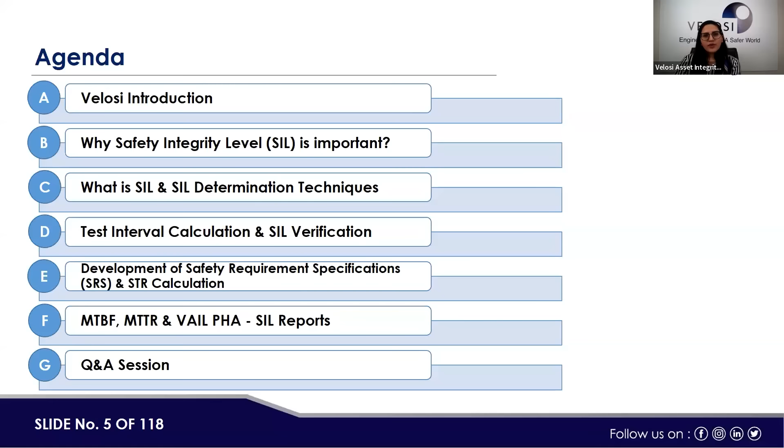Since this is a very detailed and thorough topic that we have chosen for today, we will just be touching the practical aspects. During this webinar you will go through Velosi introduction, why safety integrity level SIL is important, what is SIL and SIL determination techniques, test interval calculation and SIL verification, development of safety requirement specification (SRS) and STR calculation, MTBF, MTTR, and VAIL-PHA SIL report. At the end we will have a detailed question and answer session.

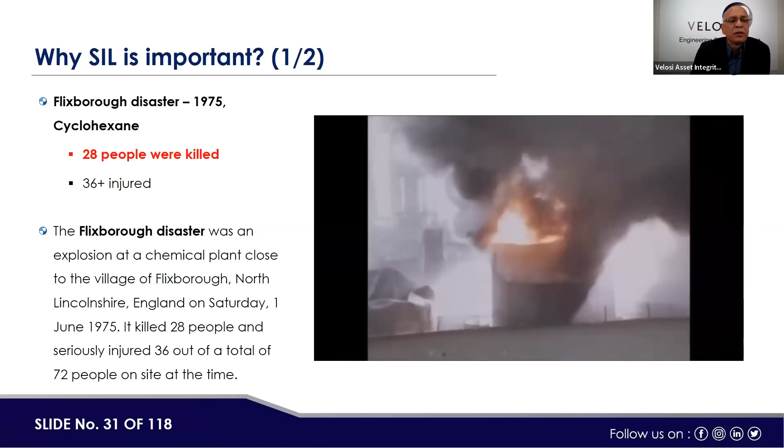It is the Flixborough disaster of 1975, where 28 people were killed and 36 got injured. As a result of this incident, there were learnings on how these kinds of incidents and fires could be prevented, and that's why these standards were basically initiated: IEC 61511 and IEC 61508.

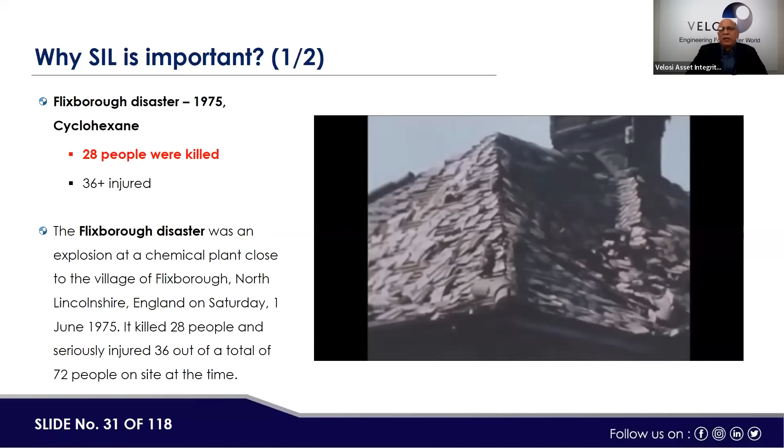So let us see, once the video completes, then I will go to the next slide.

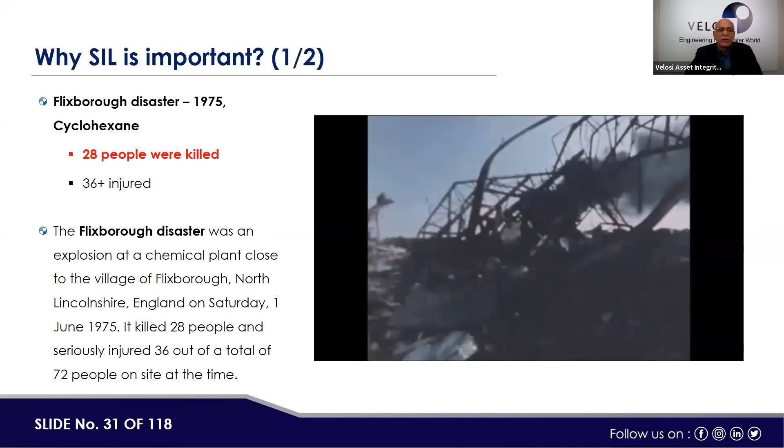This incident was in England, Saturday, 1st June 1975, and due to release of hydrocarbon and fire, there were basically 28 people killed, 36 injured. This is the end result; you can see the whole plant was destroyed and fire was still continuing.

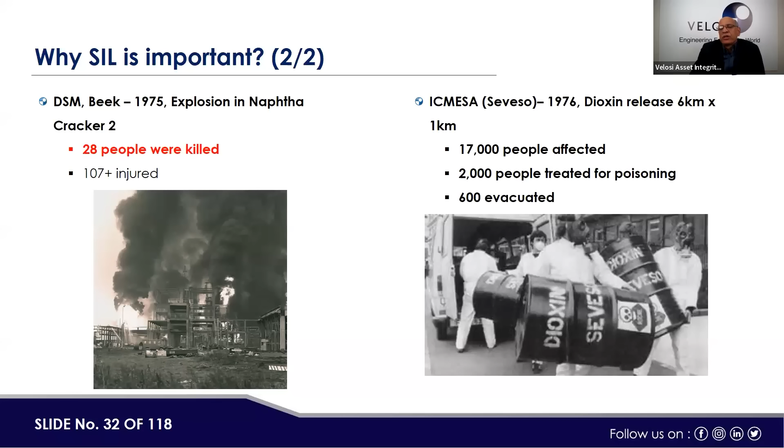There are other incidents as well, like DSM Beek in 1975, again 28 people were killed, 107 injured. Then ICMESA, Seveso 1976, an incident where 17,000 people got affected. And also don't forget the India Bhopal incident, where the carbide plant had a leakage of a toxic element that caused disaster in the area. Based on these major incidents, the industry started thinking about how such disasters can be avoided, averted, or prevented.

The reason is the Swiss cheese model, like if every layer is left to be taken care of by the next layer, and every barrier is not being attended to, then accidents can still happen. That's called the cheese model, where no barrier or system is playing its role.

Under these 9 layers of protection, one is the basic process system, like inherent safe design. Then the next stage is the basic process control systems, BPCS as we normally call it, instrumentation and control systems. That is the second layer of protection, where the control room plays its role.

Then there are alarms. In the control room, there is also control valve fluctuation, basically the control valves maintaining pressure and temperature with the help of throttling of the valves based on the signal received from the pressure transmitters, level transmitters, and flow transmitters.

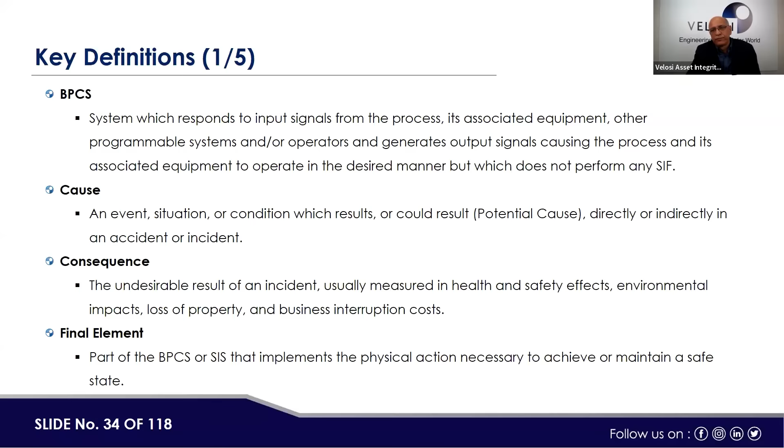Now, hazard is something with the potential to cause harm, including ill health and injury, damage to property or environment, production losses, or increased liabilities.

Then initiating event - a device failure, system failure - an initiating event is how the event would be initiated. In a SIS site, a transmitter is an initiating cause, but there could also be an error from the operator, some wrong action by the operator, which may cause the accident.

IEF is how often the initiating event is expected to occur. In LOPA, which is terminology in SIL, the IEF, initiating event frequency, is typically expressed in terms of occurrence per year. Then IPL is independent protection layer, like the 9 protection layers we've seen, which play a role to prevent any failure or disaster.

Logic solver normally is a DCS or ESD, a software which is being used by the plant to control plant operations automatically. LOPA is a layer of protection analysis which is used to see the effectiveness of the SIF.

PFD is not a process flow diagram in SIF or SIL terminology. PFD is probability of failure on demand. If any logic solver or initiator needs to perform its function, then how many times it would be successful to do the required function, or how many times it may fail.

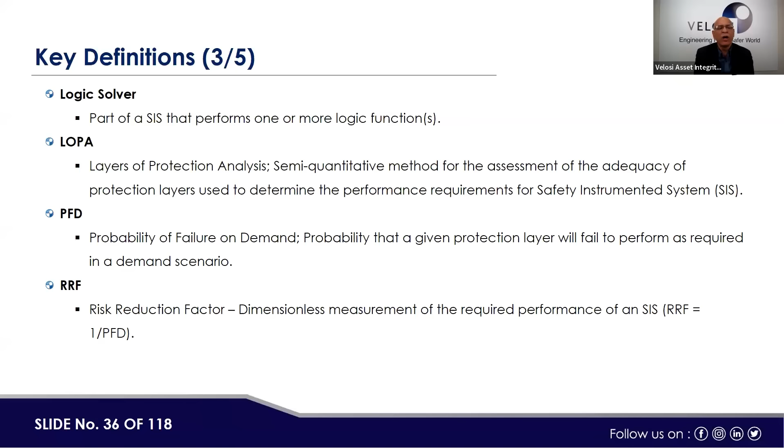Similarly, RRF is a risk reduction factor. It is a dimensionless number, and 1 over PFD is normally called the risk reduction factor.

Safeguard, like any protections or safeguards, means all the layers of protection which are installed to prevent any incident or deviation from the system. It is called safeguard, or the list of items which can play a role to prevent the incident.

Sensor is normally a transmitter or an instrument which can read the values or numbers to detect the process condition, whether it's a level transmitter, pressure transmitter, flow transmitter, or vibration transmitter. These are also called transmitters or sensors.

Severity means a measure of the degree of impact of a particular consequence.

Next, a safety instrumented function. A safety function with a specific integrity level that is necessary to achieve functional safety by putting a process to a safe state or maintaining its safe state. That's called SIF. Basically, SIF is the topic of the day where we determine the SIL classification or SIL subject.

SIF is a defined system like a safety instrumented function, while SIS means the whole ESD system, like level 1, level 2, or level 0, whatever instrument system would be playing its role in case of any emergency or if any operator given action. That's called SIF, and SIS is the overall system name.

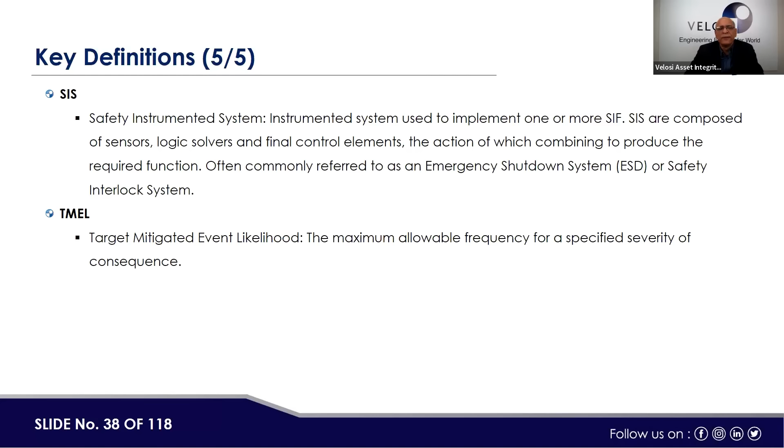TMEL, this terminology is used mainly for the SIL classification and SIL assessment process, and it stands for target mitigated event likelihood, like how much risk reduction is required by the SIF. Target mitigated event likelihood is the maximum allowable frequency for a specified severity of consequence. We will see this as we go to the next definition or detail of SIL.

Now, what is SIL? I told you earlier. SIL stands for Safety Integrity Level. Safety integrity level is defined as a level of risk reduction provided by a safety function or SIF. It is a way to measure the performance of a safety instrumented function, SIF.

A SIF is a combination of sensor or sensors (there could be more than one), logic solver, and final element or elements (there could be one or multiple) that detect the hazard and bring the process to a safe state. In general, if a hazard is happening, then the SIF is playing its role to bring the system to a safe state.

So a sensor, logic solver, and final element, these three things make one SIF.

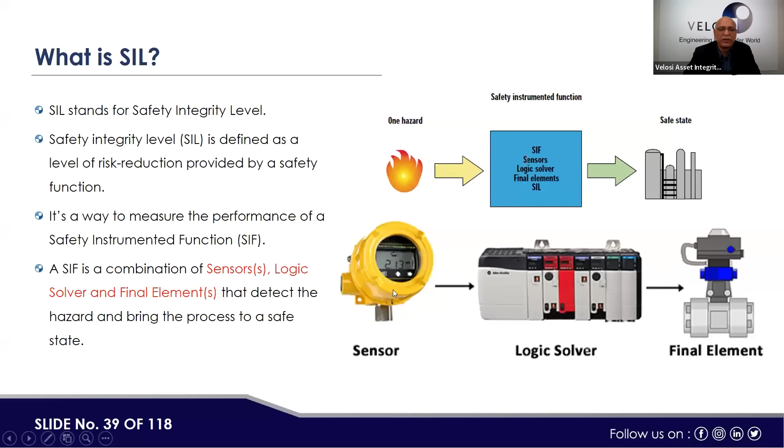Further detail: when we say SIL of a SIF, it defines the reliability range. SIL is normally defined as SIL 1, SIL 2, SIL 3, SIL 4. This is based on IEC 61508 and IEC 61511 standards, where RRF means 1 over PFD.

SIL 1 means risk reduction factor 10, and PFD between 10 raised to minus 1 and 10 raised to minus 2. This means that if we check one SIF 10 times, it should fail only one time. It means the system is reliable from 90 to 99%. Similarly, if there is a population of 10 of those SIFs, if we check 10, only one SIF should be failing.

SIL 2 means failure rate 1 out of 100. SIL 3 means failure rate 1 out of 1000. SIL 4 means 10 raised to power minus 4, meaning if we check one SIF 10,000 times, it should fail only one time. So that RRF is about 10,000 risk reduction factor from a safety point of view.

And why do we need that kind of reliability? Because if that safety system does not work, there are huge consequences in terms of loss of life, or loss of production, or asset loss.

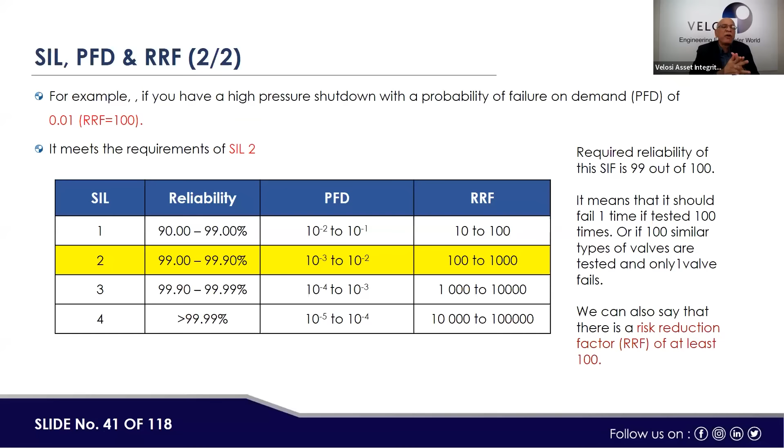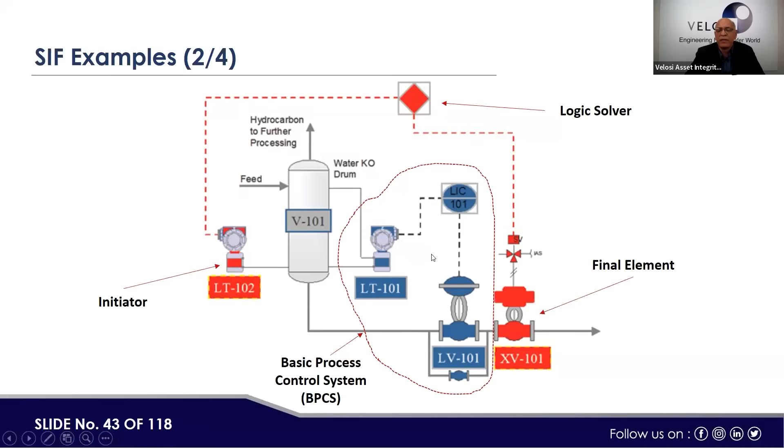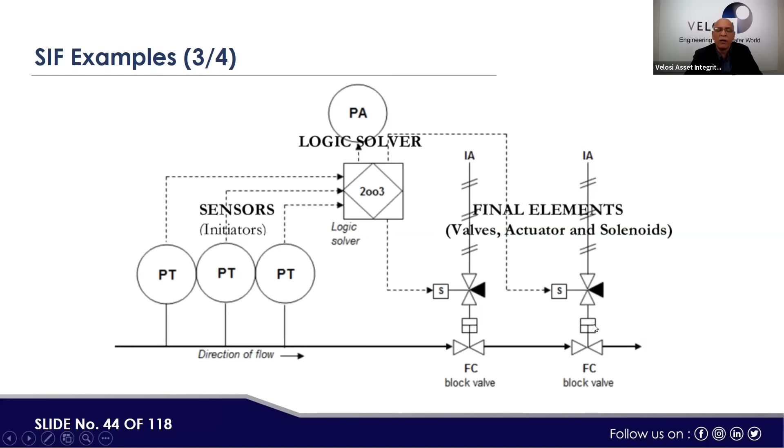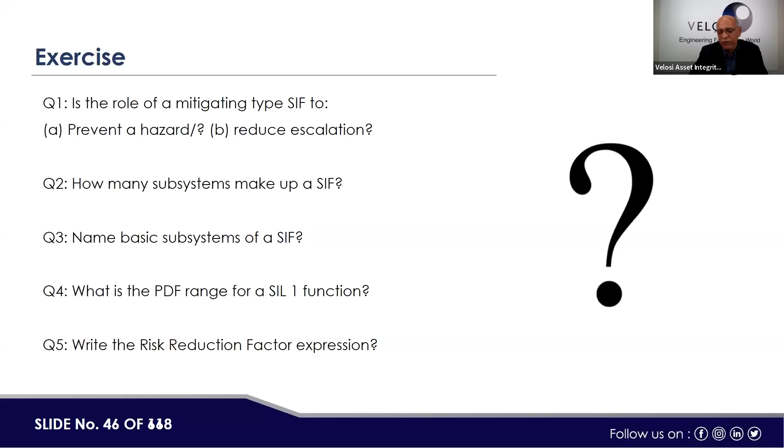Is the role of a mitigating type SIF to prevent a hazard or reduce escalation? Is both A and B correct?

How many subsystems make up a SIF? Three: initiator, logic solver, and final element. Names are given in question number 3.

Now question number 4. For a SIL1 function, the PFD range is 0.01 to 0.1, that is 1 out of 10 failure rate. Similarly, the risk reduction factor expression is RRF equals 1 over PFD.

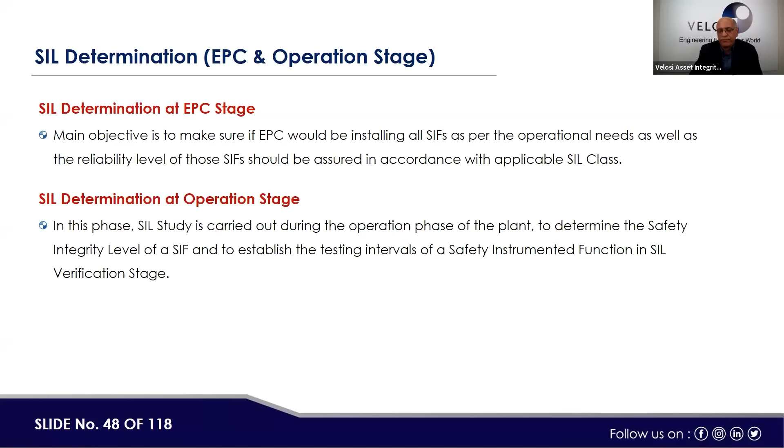That's why, based on best industrial practices we have seen, like under Norwegian standards, and also ADNOC, they have determined minimum SIL 1. In Norwegian standards I can refer to, they say in case of PSHH, LSHH, minimum SIL should be 1.

For level switch high or temperature switch high and temperature low - but for LSH high on a knockout drum where liquid carryover to the compressor is possible, it may cause damage to the compressor and fire, or there could be gas blow-by cases. If the gas goes to a lower pressure system like a drainage system, it can put the plant in a horrible condition.

So the minimum SIL level there is 2, but for TS high and PSL - pressure switch low for leak detection - it is 0, meaning no SIL is required. Similarly, for other areas, best industrial practice says: pressure segregation valves, SIL level 2; depressurization valves like blowdown valves, 2; well isolation single valve, 3; chlorine isolation, 2; fire and gas detection, 2; electrical isolation, 2; deluge system, 1.

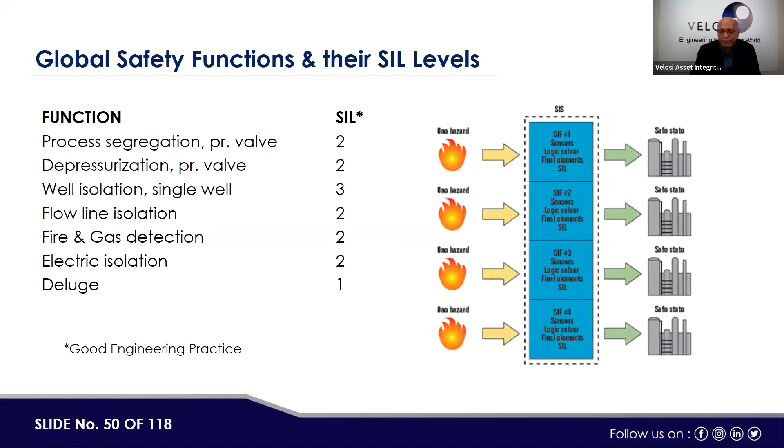So, the applicable standards - main one which is basically controlled and assessed is IEC 61511. This is a standard for safety instrumented systems for the process industry, covering framework, definition, system, hardware and application programming requirements.

Similarly, 61508 is basically about all the programmable logic solvers, how they should be designed and safely tested. Then there is also the ISA standard, which is about safety instrumented function SIL, safety integrity level SIL evaluation technique, part 1. There are other parts as well.

So what we are trying to do here, as part of this orientation, the participants will try to get familiar with the applicable standards and the basic techniques. In my view, SIL is not a very difficult subject, but it needs some knowledge regarding process engineering, process operations, and then the instrumentation side.

If you have the basic knowledge of these three areas, or you have three engineers coming - one from process, one from operations, and the third from instrumentation - and if process safety is also there, four engineers, you people can do a good SIL study. It's not such a difficult subject to handle.

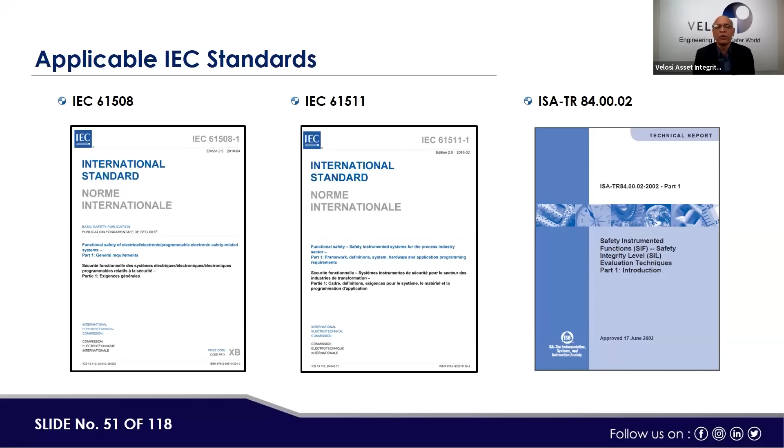So now, as per the standard, the life cycle of a SIF - for everything it starts from birth to retirement. So here at feed stage or concept stage, then feed stage, EPC stage, then commissioning stage, then it goes to the operation phase and overall management, and then decommissioning. So the life cycle is like a project life cycle, and the SIFs are taken care of from the beginning to the end - that's the normal concept.

Here, various phases are there, and we can make these phases more difficult or easier - both ways are possible. But we know that at feed stage, then EPC stage - E for engineering, P for procurement, C for construction - and then operational phase stage as well. It could be made more steps, like there are 11 phases being referred to in the system, and more details are there as well. But in general, we have to take care of the SIFs or instruments at each phase of the project life cycle.

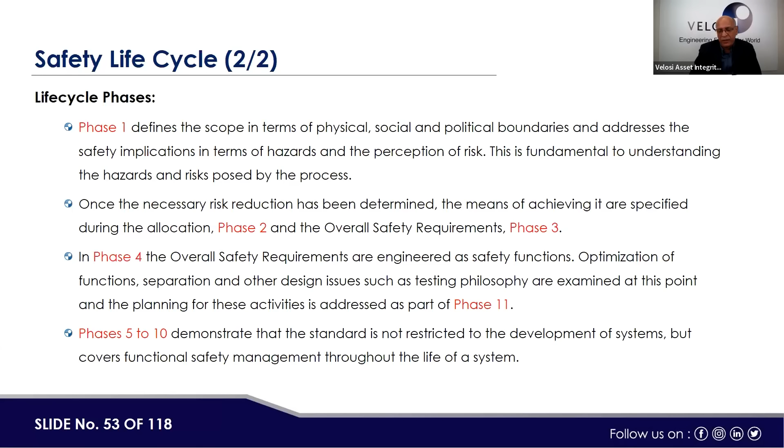So next is why we need software for SIL studies. I have the answer - SIL classification can be done by Excel spreadsheet also. SIL determination is done once, then SIL verification can also be done using an Excel spreadsheet, and we have both options available. However...

When it comes to facilities where we don't have hundreds but thousands of SIFs in one particular facility - we have worked on projects where the number of SIFs ranged from, let's say, 100 to 4,000 or 5,000. For a refinery, there could be 3,000 SIFs, and for a fertilizer plant, covering urea, ammonia, utility and offsite, there could be up to 3,000 to 3,500 SIFs. So if you wish to arrange all that information in Excel, the spreadsheet becomes very bulky and very slow in movement. Because of that reason, it's better if we can use some software.

Velosi has a VAIL-PHA SIL module. We are using that for various studies - those spreadsheets we will show you. It's also available for public use, and we are selling that software too, and using it in our consultancy studies as well.

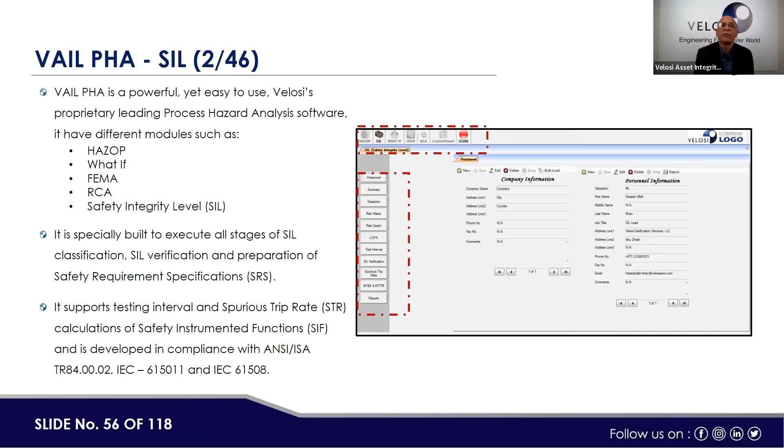Here, we try to start with the HAZOP process or what-if process, and in our software which is available, we have HAZOP, what-if, FEMA, and RCA and safety integrity level. But we are focusing only on the SIL here, and this SIL assessment is done in accordance with the IEC 61508 and IEC 61511 standards.

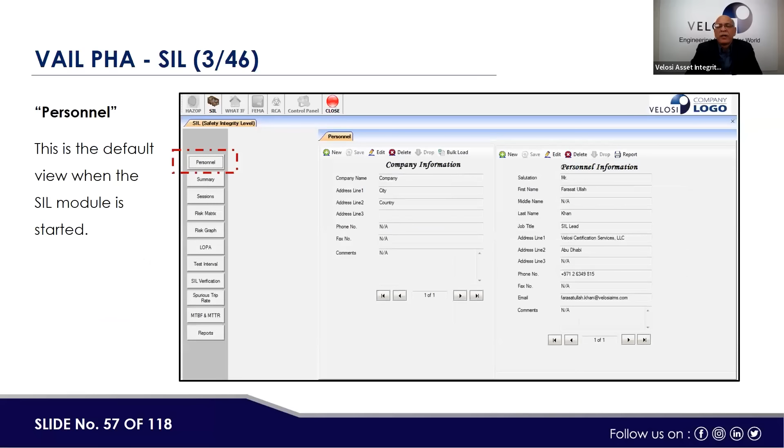So here, for the workshop, if we're conducting one, the details of the people who would be participating can be added. Then the company details for which the SIL study is being done.

Then sessions - various sessions could be conducted at various times. Then SIF information, which is on the upper side of the function, like location of the SIF, P&ID, description, then its consequences and effects. So this is a screen.

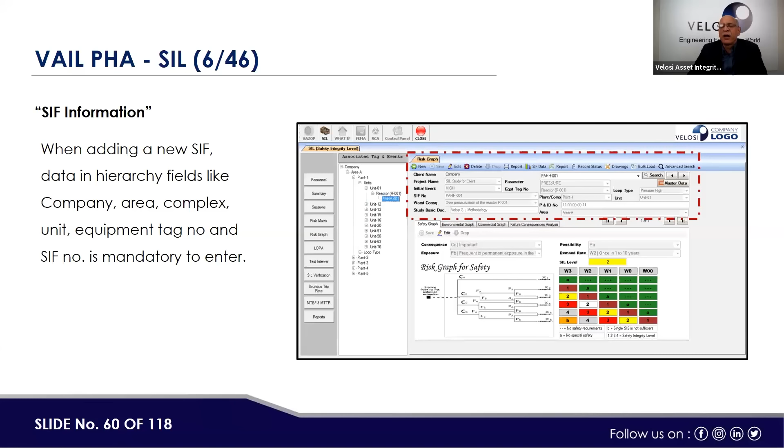What we are trying to show is the risk graph, and similar aspects are also applicable on the LOPA or risk matrix side as well.

Then SIF data - if you can see it, for example, initiation, then logic solver and their details, final element and their details, then SIF narrative.

If we try to add all this information in Excel, it will become a little difficult to handle, even though I will show you how it can be done in Excel also. But if you're doing it in the software, then it's easy to manage.

Here, SIL determination technique - there are three techniques which we normally follow. One is risk matrix, which is qualitative. Risk graph is also qualitative, but I'd say it's in between qualitative and semi-quantitative. And then layer of protection analysis, LOPA, which is normally more respected in the industry - that's called a semi-quantitative technique. We will be covering this.

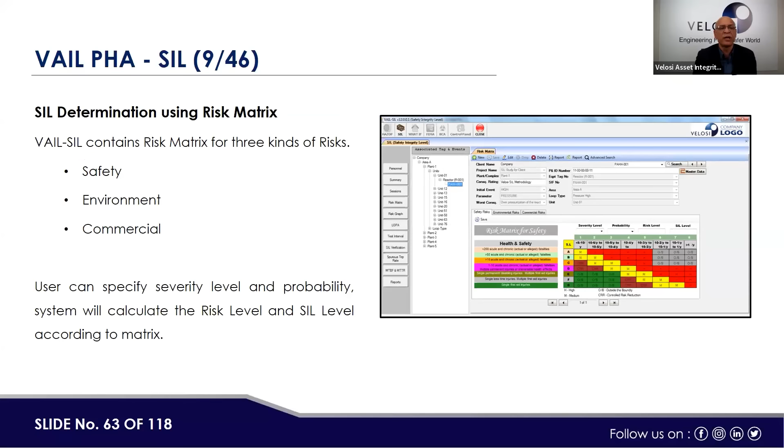Now, when we go to the risk matrix aspect, there are three consequence areas covered by the SIL: safety, environment, and commercial. The user can specify severity level and probability. We will calculate the risk level and SIL level according to the matrix. We can show you at the software demonstration stage how we do it, and it's easy to follow.

Then SIL determination using risk graph, which is one of three methods. There are basically three main factors which are important under risk graph methodology: demand rate, which is W - meaning how many times in a year the SIF is required to act in case of any emergency, like how many times that emergency scenario will arise.

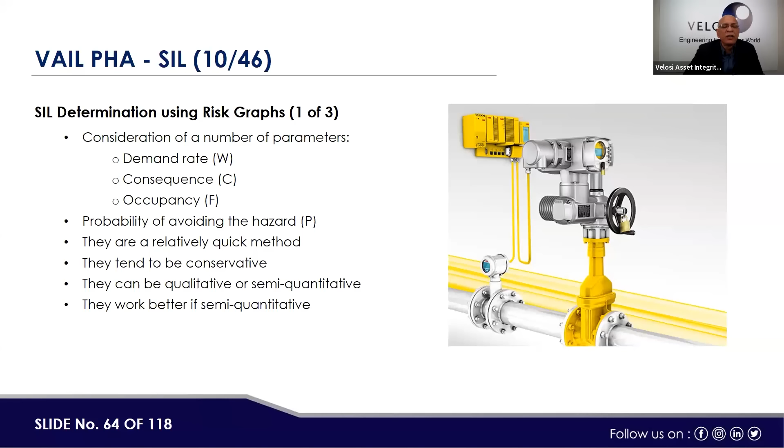Consequence C - if the SIF would not be able to protect or act, then what could be the consequence? Occupancy - how many people are there in that particular area? Then the next factor is probability of avoiding the hazard. These are relatively quick methods; they tend to be conservative. They can be qualitative or semi-quantitative, and they work better if semi-quantitative. So this is a normal SIL determination by risk graph.

Here the process begins by defining the equipment under control, EUC - equipment under consideration - and the environment in which it is operating, in the following sequence. Number one, identify the boundaries of the equipment under control, from where to where. Identify the hazard associated with the equipment under consideration. For each hazard, assess its likelihood and consequence of occurrence without any protective system.

Knowing the frequency and consequence of all hazards, determine the current risk level. Determine whether the current risk levels are acceptable. If risk levels are not acceptable, then consider the risk reduction to be achieved by an external risk reduction factor.

Then, if an electrical/electronic/programmable electronic system based on SRS is required - safety requirement specification - then utilize an approach such as the risk graph to determine the requirement for a SIL level for the proposed system. If a SIL level is required, determine if the design of the proposed safety system meets the numerical requirement for probability of failure on demand for the SIL level specified.

Ensure compliance with the remaining requirements of the standard for the particular SIL level chosen, in terms of documentation requirements and software architecture and testing requirements.

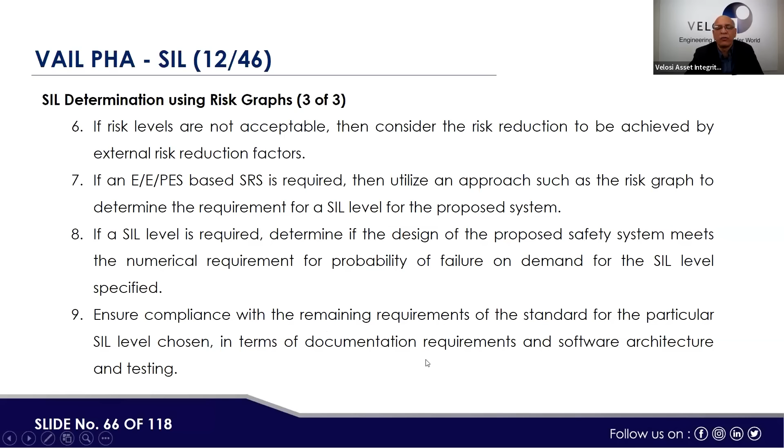On risk graph methodology, there are basically three types of risk considered: one is safety-related risk, another is environmental-related risk, and third is financial or commercial-related risk.

If we take one SIF, like in a particular pressure vessel, let's say the SIF does not work, there would be failure or rupture and there could be a fire. Then we have to see how many people would be available or impacted in that area. So these are CA, CB, CC, CD. If we consider the death of several persons, then CC applies. Then we say frequency of exposure time, how much time people would be there.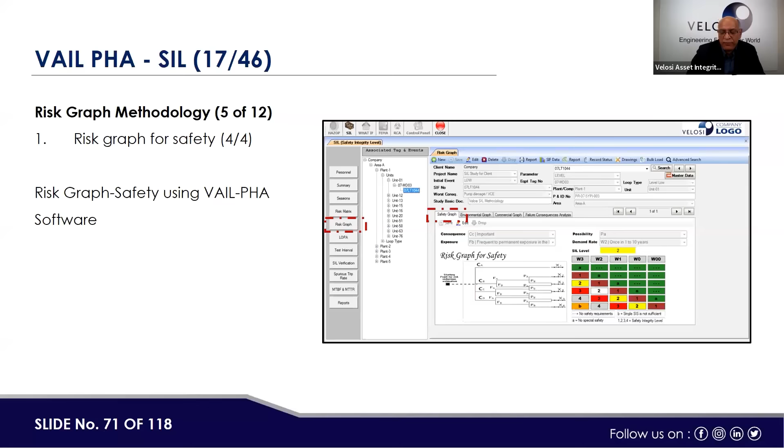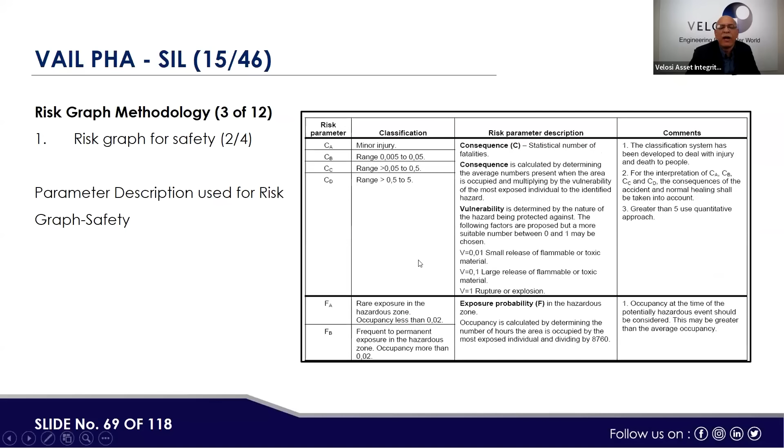The same thing applies for environment, but one thing is basically removed - we'll see that. F is exposure, like how many operators would be in that particular area. Best to explain everything with this slide, where I have C, F, P, and W - there are 4 variables. If we select for each, the SIL would be determined right or wrong. So this is the risk graph method.

So here, same as before, what is the impact - minor damage to environment, severe damage to environment, or unacceptable level. For example, oil release in the sea, which may cause effects on all the shores, is consequence-wise more important than on the onshore side.

So those aspects, the scale, whatever your plant would like to follow - these scales are provided, and we need to follow these scales, whatever is applicable on our particular SIF and the plant, where you would be doing this assessment.

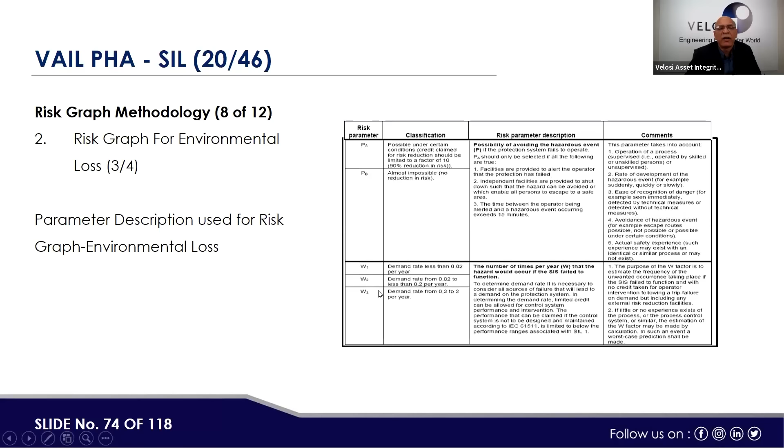Same risk graph, like here, PA, PB, F factor is not there, all 3 factors are same. This is the last one, the software - when we click that, it goes basically by our aspects. This is just showing it can be done by Excel, but on the software side we can pick it, and this exercise would be done at the next stage of this session.

Then there's the commercial aspect. Commercial means how much damage it will cause to equipment, and how much money would be required to be spent by the plant owners in case something goes wrong.

So again, I will remind why we are doing SIL. We are doing SIL to check the safety integrity level of that particular SIF, which would be able to protect or shut down the plant in case of any emergency.

And we are also keeping in mind that if this SIF would not be available, there could be accidents, there could be disasters. That's the earlier example I showed, like the Bhopal incident, and other incidents where a number of people were killed. Even Piper Alpha is one of those, in the North Sea.

So it's important how we can determine this SIL, how this SIF is important, and then how we should do proof testing of these SIFs - we should not take risk for the investor.

So this commercial aspect shows if an investor will not allow it, or the plant owners or senior management would not give time to test the functionality of the SIFs - because shutdown is not being given, or time is not being given, or technicians are not being given to test the SIFs, or SIFs are not installed at all - that could be a scenario.

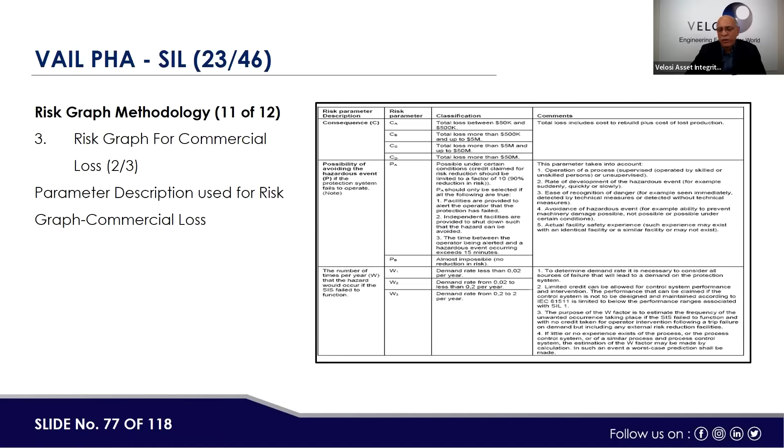Then possibility of avoidance, the number of times per year the SIF is required. If we try to answer these three variables, we can get the SIL. So it means if we understand the phenomena of the risk graph, it is easy to determine the SIL of any particular loop. This is the end, like a software, how we do in our software.

So we've got the safety, environment, and commercial graph, and the failure consequences analysis also there, right?

Now, before we go to SIL determination by risk graph methodology, let's try an example using the VAIL-PHA. If I try that example, that will be done, I think, at a later stage.

So here is the risk graph. This is Velosi software. If I go to risk graph, let's see - first the safety, one loop is there, and if something is already picked, we can change it.

If I go to edit, see here - CA, CB, CC, CD, right? If we pick any one, currently you can see this is SIL level 2, and here we have picked CC. If I pick CD instead, SIL has changed, right? If I pick the first one, CA, then no SIL is required. Everything is determined by the consequence determination. If I make it CB, it's still no SIL required.

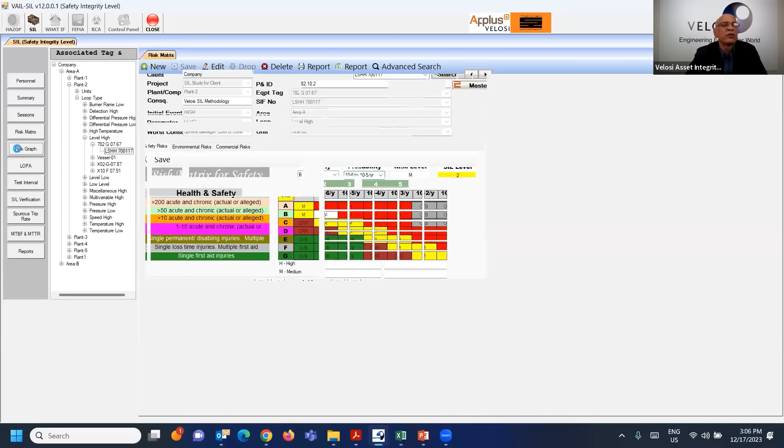So next, if I say this is a risk graph, then we got risk graph, risk matrix, risk graph. What we have covered - personnel, summary, sessions - risk matrix, risk graph. Right now, next would be LOPA.

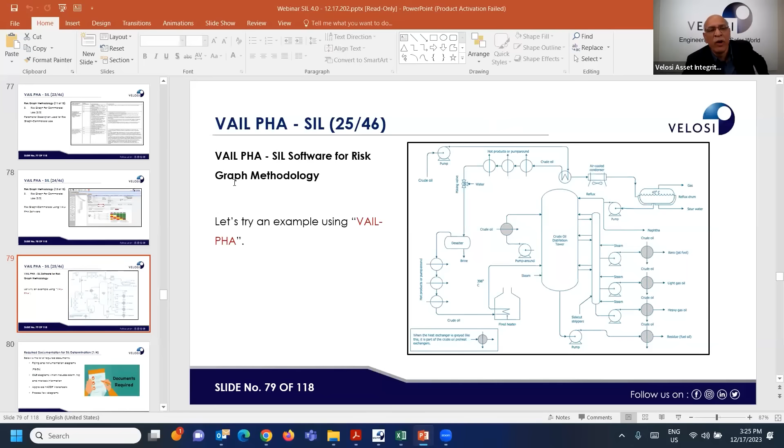Okay sir, so the PHA exercise we have done, right? And next would be the LOPA exercise. So what documents do we normally need for SIL determination if we try to see?

The first is the piping and instrumentation diagram, P&ID, cause and effect diagram, interlock information, then the approved HAZOP worksheet if HAZOP is done. If HAZOP is not done, we can still do SIL classification by considering deviations ourselves. Then PFDs also help to see the simplified version of the process.

Here, like one of the ESD systems, which is marked, is a SIF, and it's marked on the P&ID. Then we have to see this loop in the cause and effect chart - like there's one transmitter which will activate, and then it will stop the reactor inlet pump, right? So the second thing is the cause and effect chart.

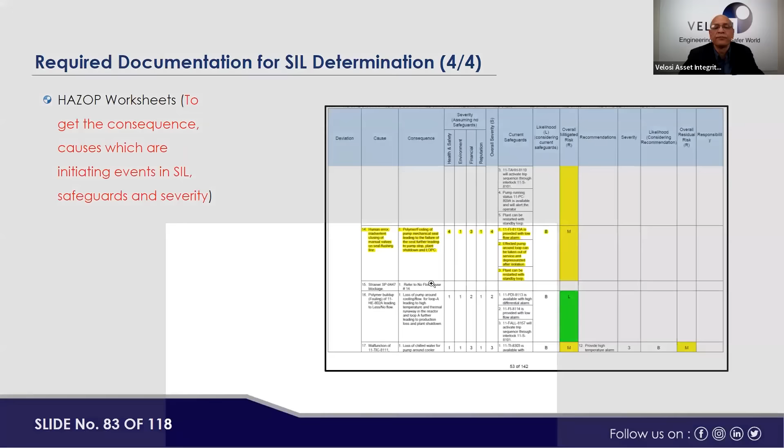Then this is the HAZOP sheet. If it's available, like a human error - it says human error: inadvertent closing of a manual valve on a seal flushing line, then polymer fouling of the pump mechanical seal leading to failure of the seal, further leading to pump stop, plant shutdown, and LOPC. And this is severity 4, which is the risk matrix position.

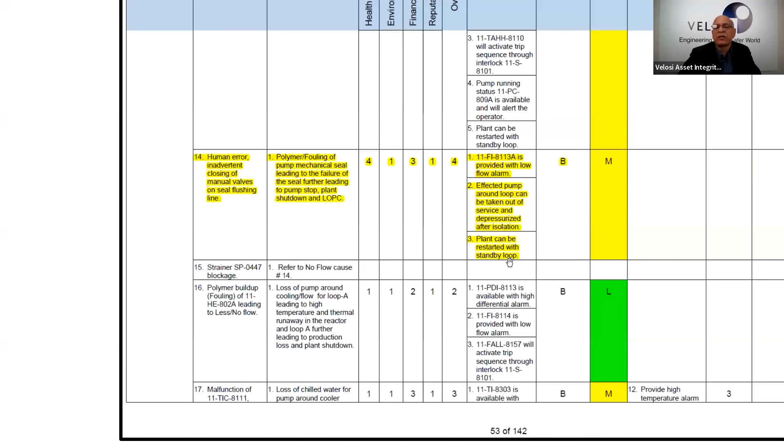And then the current safeguards really provide a low flow alarm. Then the affected pump around loop can be taken out of service and depressurized after isolation. The plant can be restarted with the standby loop. So this is basically the one loop considered in this SIL assessment.

Now here, when we add all those values, SIL classification can be assigned by the software using the LOPA technique. So we'll go to LOPA next. Here, LOPA stands for Layer of Protection Analysis. LOPA is the process to re-evaluate.

I will do an Excel side as well, this will be more explanatory for you, with explicit risk tolerance for the specific consequences. LOPA can be used at any point in the life cycle of the project or process, but is most effective when implemented during front-end loading, when process flow diagrams are complete and P&IDs are being developed.

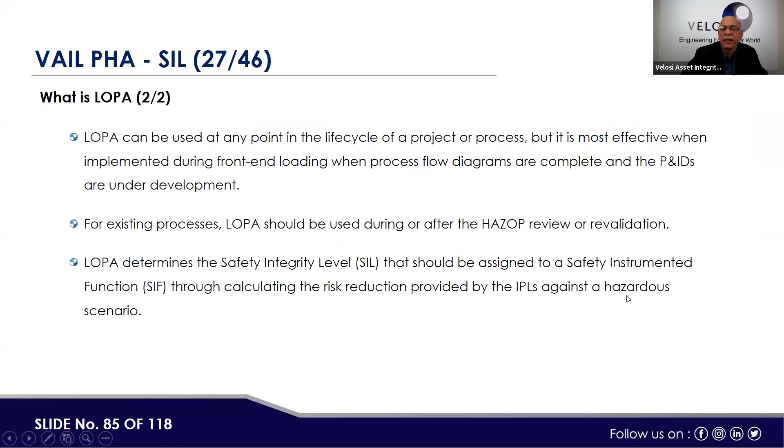For existing processes, LOPA should be used during or after the HAZOP review or revalidation. LOPA determines the safety integrity level that should be assigned to a safety instrumented function, SIF, by calculating the risk reduction provided by IPLs against a hazardous scenario, from a definition point of view. So let's go for the determination - identification of the SIF. LOPA starts by selecting the SIF from the P&ID and cause and effect chart. The LOPA team should understand the SIF function description and the consequence of the hazard it prevents. This is the definition.

So we have the ESD loop, for example, SIF description, high pressure in the reactor. Initiator is the PAHH-001, initiating ESD to prevent overpressurization of the reactor R001. Logic solver is ESD, based on logic it executes the sequence of actions.

Then the SIF narrative is: high pressure in the reactor R001 detected by pressure transmitter PAHH-001 initiates SIS safety critical action via the ESD logic solver.

The standard is this client guideline with SIL methodology. Some client names have been changed for secrecy. Then the HAZOP study report and this as-found sheet, LOPA is to be performed. The basic information is provided.

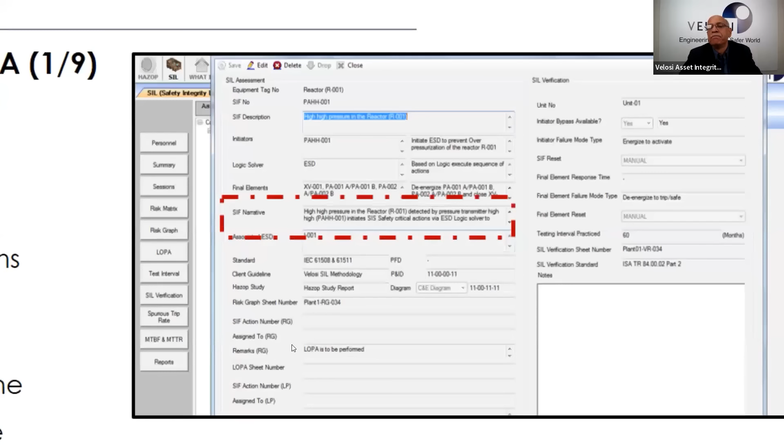Then below is the LOPA, understanding the HAZOP which I showed you earlier. Then TMEL values - TMEL comes from the target mitigated event likelihood, which is very important.

Basically safety is a 4, 1, 3, 1, and the highest is a 4. And this value is taken, as I'll show you.

If safety TMEL is 3, it means 10 raised to power minus 5. Environment 3 means 10 raised to power minus 5 again. And this comes from the risk matrix of the company.

This is a little time-taking activity to understand, and that's a limitation for me. If we could do one exercise together, in 30 minutes we can understand, but due to my time limitation, I can show you in Excel. Explaining it, it's not so difficult, but this is the only thing to understand - the severity and TMEL relationship.

And SIL mainly rotates around it. If severity is low, SIL would be low. If it's high, SIL would be high.

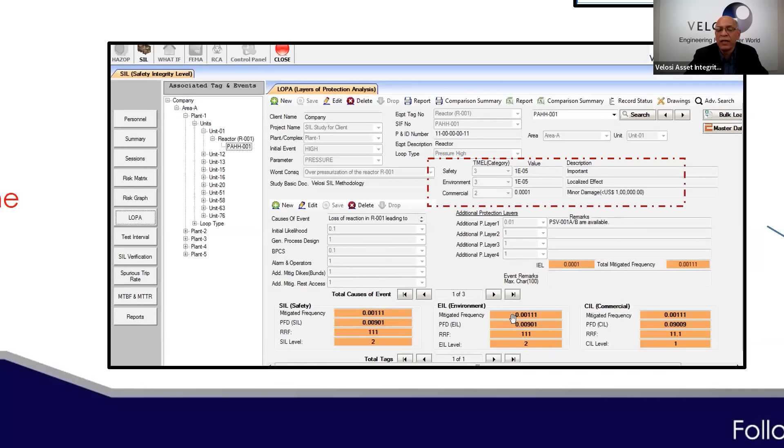Then there are layers of protection - how many layers of protection are there, and how those layers of protection should be used. And then we get the SIL. If you can see here, SIL is safety integrity level, EIL is environmental integrity level, and CIL is the commercial integrity level.

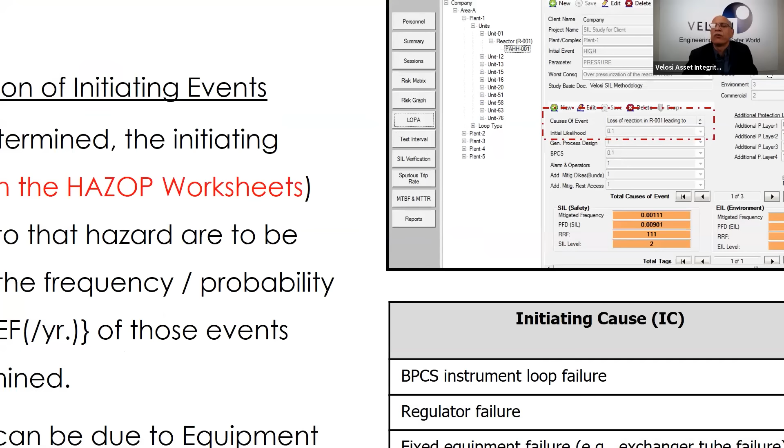Then determination of the initiating event - basically that's this factor, like loss of reaction in the reactor, and likelihood, initial likelihood 0.1. Then BPCS basically IPL comes in at 0.1. If both multipliers are given, IEL is division of the TMEL, and we get basically RRF, and RRF gives us basically the SIL level.

Once TMEL is determined, the initiating event causes in the HAZOP worksheet that could lead to that hazard are to be identified. Then the frequency, probability of occurrence of those events are to be determined. Initiating events can be due to equipment failure or human error. This explanation I'm giving, but if you do the exercise, it would be easy to understand.

I will do the Excel side next. Okay, identification of IPL - what are the protective layers, and these protective layers would have their own PFD, like probability of failure on demand.

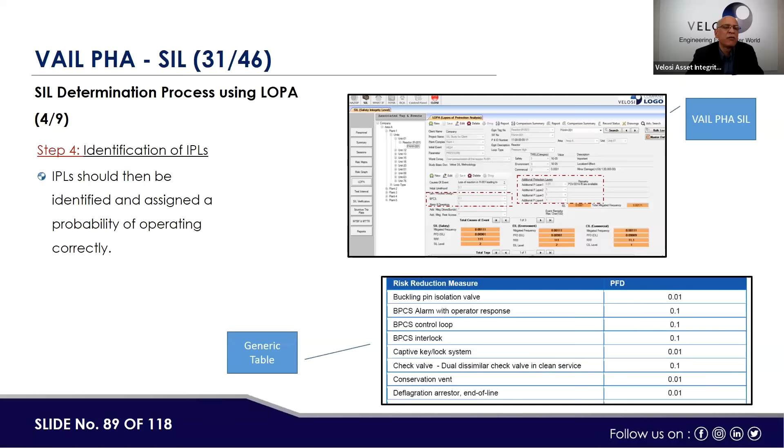For example, if BPCS interlock, it is 0.1. If it is a check valve, dual dissimilar check valves in clean service, 0.1. Similarly for PSV, the PFD or risk reduction factor is 0.01 for clean service and 0.1 for dirty service. The IPL, how we use them.

Then SIL determination for the process using LOPA. Step by step, once initiating events and IPLs for an event scenario have been identified, the IEL, intermediate event likelihood, can be calculated using the following formula.

IEL is all the layers of protection and their PFDs multiplied, along with the initiating event, for one basically scenario, one cause. For each cause we need to do this, and we add up all those causes, and then SIL is determined. We'll show you next.

So here, step 5, we have calculated IEL by multiplying all the protective layers with their PFDs.

Step 6, the required PFD for a SIF being assessed can be calculated from the residual risk frequency using the following: PFD, which is probability of failure on demand, equals TMEL divided by total mitigated event frequency. And once we get it...

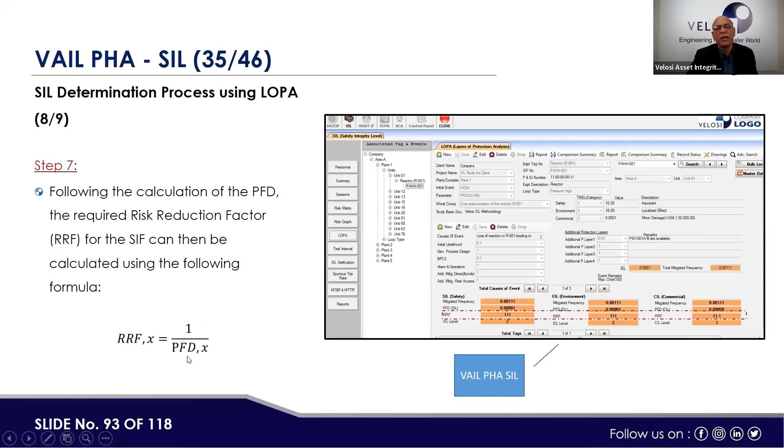Step 7, where 1 over PFD - following the calculation of the PFD, the required risk reduction factor, RRF, for the SIF can then be calculated using 1 over PFD, and that will give you the risk reduction factor. Or even from the PFD, we can calculate the required SIL.

So if you see this, LOPA is a little complicated, but if you do 1 or 2 exercises, it's very easy to follow. So don't get worried, and if you do it yourself using either software or even an Excel spreadsheet, I will also show you the Excel spreadsheet.

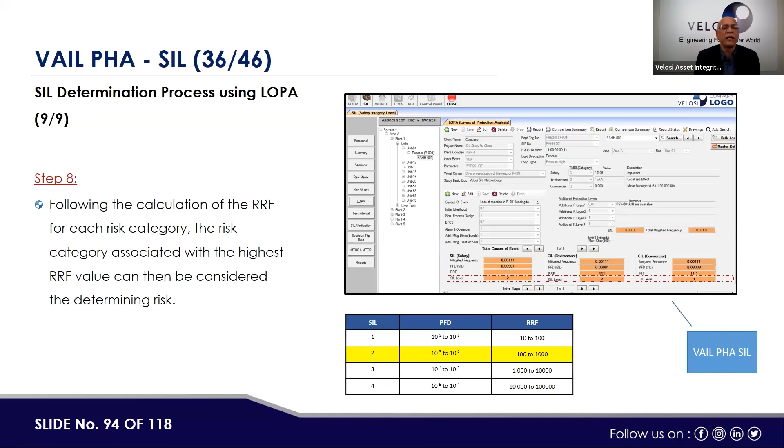Following the calculation of RRF for each risk category, the risk category associated with the highest RRF value can then be considered to determine the risk.

Then the software, as we're showing you, let's try an example to understand the LOPA methodology using PHA software. So here, testing interval is next. We can leave it and go back to the determination.

On the software side, if I go to LOPA here, it's already there. For example, edit - so here initial likelihood, by putting the layer of protection we can add detail, like alarm. Then basically additional protection, PSV, and this, then we get the SIL. By changing these, we can get other results.

Now, since in the software this cannot be explained so fast, Excel is very easy, and I'm trying to show you that Excel spreadsheet now. Can you see my screen?

Excel - okay, so here first of all we try to prepare the SIF list for all the SIFs. This is for the ammonia area.

Under that, what we have is site, unit area, cause effect interlock, logic diagram number, P&ID number, SIF tag number, case number, SIF description. Then this is the draft SIL, like what we have determined, we'll show you. Then here, previous SIL, target SIL, and remarks. But we see some remark has a reference available, not available.

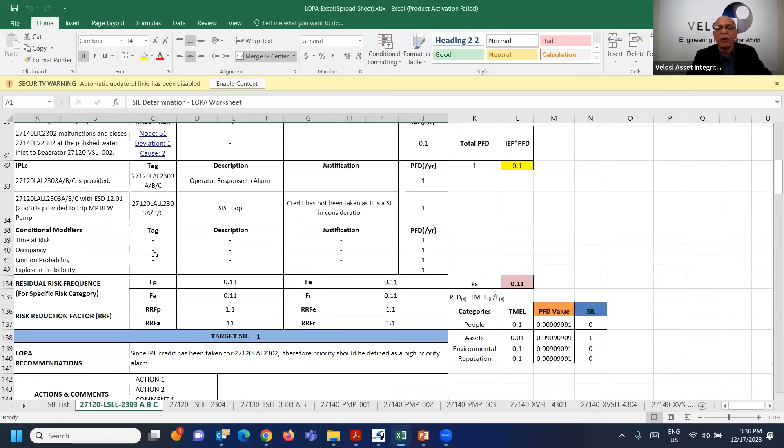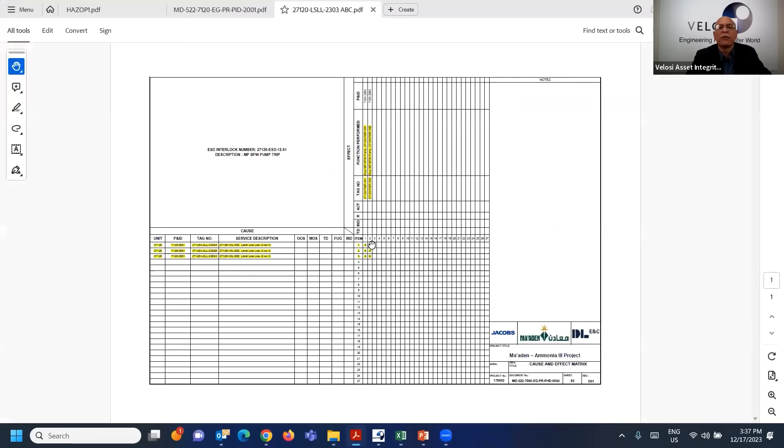So if we try to do SIL by Excel spreadsheet LOPA, this is easy to me, because here we can make a hyperlink to the P&ID and my loop is there. Similarly, if I go to the cause and effect chart, by clicking the button, I can see it is there and I can check. Similarly, for HAZOP reference, I can make hyperlinks and I can see my loop there. So having an Excel spreadsheet in LOPA makes it easy to do.

And software-wise, information would be at a later stage, we transfer this information to software as well. LOPA, we prefer to do in Excel, and then we import it into the software system, because the next stages, like SIL verification, testing interval, SRS, all those things are easy to manage in software. Whereas when it comes to the links point of view, that is easy to manage in the Excel spreadsheet, and people can understand it in the one spreadsheet. So we are using both options for the presentation point of view.

So for the presentation, can you go back to the mode? Okay. So methodology I showed you both, but the practice which can be done in this time, we have to leave it there. Next time, or if you have to do more exercise, some other model can be used. Okay, next slide.

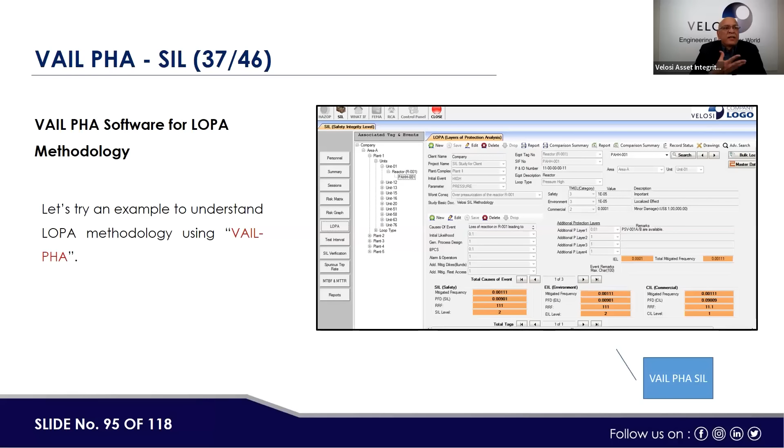Okay, testing interval. Now we are going to the SIL verification. What is the purpose of the SIL? Now, if we are determining the SIL, what is the purpose? There are two purposes, as I said earlier. At EPC stage,

we have to buy equipment. So we need to determine the SIL so we can buy equipment with that particular SIL classification or SIL reliability. Secondly, in the operation phase, our main objective is to calculate the testing interval. So it's considered to be a major parameter in the SIL verification phase. SIF testing interval signifies the interval at which the periodic proof tests are conducted. It indicates how strong this requirement is, as during the SIL verification, the proof test interval may be adjusted to

accomplish the target SIL. Here, PFDs are there, and this is the formula for the SIL determination. And below is the spurious rate, which could be accepted as a spurious trip - how many spurious trips could be accepted for the nature of the loop. So here, for a simple loop, which is 1 out of 1 vote, half lambda du Ti. Ti is the testing interval. Du is undetected failure rate - the failure rate of the loop or a particular item, like initiator, logic solver, or final element. So if this is the SIL data, failure rate and testing interval can be calculated.

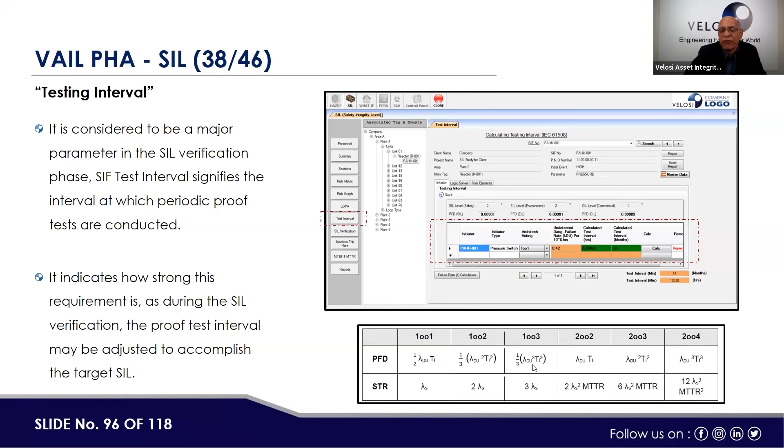For the second configuration with 1 out of 2 transmitters - if 2 transmitters, if one transmitter is giving you a signal, then this formula. If 3 transmitters are used to give the signal, if 1 out of 3, then this formula; 2 out of 3, this formula; 2 out of 4, if 4 transmitters are installed, this formula, right? So this way we can calculate testing interval. It's not difficult to follow. It can be used by Excel or by software as well.

SIL verification also uses the testing interval and failure rate, whether actual versus average industry failure rate from EXIDA or OREDA data. If that failure rate is added with the testing interval, we can calculate the PFD. Then we compare the actual PFD versus the desired one. Actual means what we calculated, and earlier at the design stage, SIL determination stage, we see whether both results match or not with the testing interval.

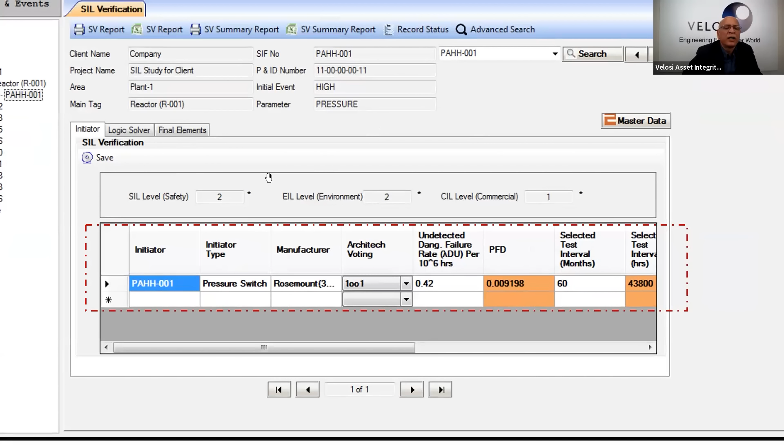This PFD can be compared with the earlier SIL. This is SIL 2, this is the testing interval. So this is the part of SIL verification for initiator, logic solver, and final element. These calculations are made for each item of the SIF.

SIL verification is carried out to calculate the actual SIL level or PFD of the SIF loop to know if the risk reduction required is achieved, depending upon factors like architecture voting, testing interval, and reliability data. SIL verification is carried out using the simplified equation method, though complicated formulas can also be used.

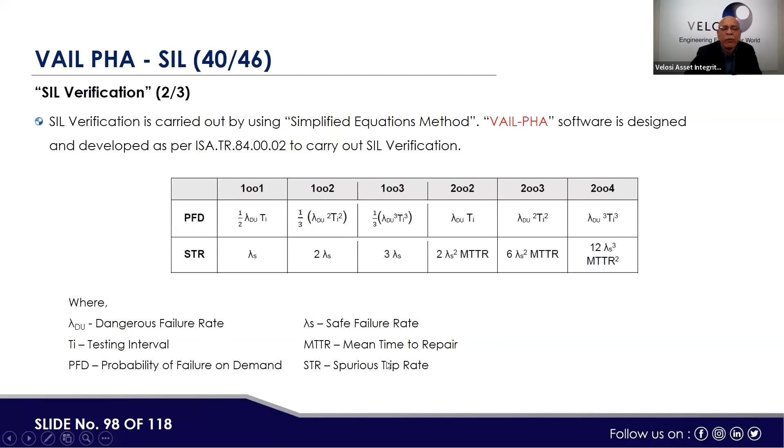VAIL-PHA software is designed and developed as per ISA TR 84.00.02 to carry out SIL verification. These are the formulas. STR is spurious trip rate, lambda DU is dangerous failure rate, TI is testing interval, PFD is probability of failure on demand, lambda S is safe failure rate, MTTR is mean time to repair, and STR is spurious trip rate.

So this is the equation shown in the software. Architecture voting is to be taken from P&IDs and cause and effect charts, like how many transmitters are actually there. The reliability data can be taken from EXIDA, OREDA, or the plant itself. Testing intervals are adjusted to make the actual SIL level equal to or greater than the required target SIL level.

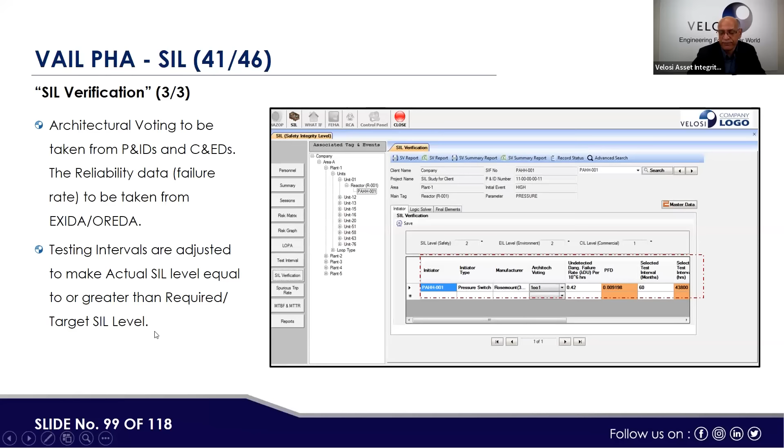Then STR, SRS. STR is spurious trip rate and SRS is safety requirement specification. The spurious trip rate is also calculated for all components of the SIF - initiator, logic solver, and final element. Spurious tripping is the unwanted tripping of the system caused by any of its elements when no demand occurs.

Spurious means a situation like in a fire and gas detection system - sometimes we receive an alarm, but no incident is observed or reported from the system. The actual situation is not there, but a trip is occurring. That's what we call a spurious trip.

SIF cross reference, description, target SIL, then SIF initiating devices, initiating voting, functional description, corresponding ESD number which is called SIS, then final elements, hazard, consequences, triggering and tripping, required SIF action, SIF set point, normal operation value, pre-alarm availability, target spurious rate, then proof test interval, demand rate, mode of operation, manual shutdown, trip, bypass, overrides. All this information is required to be filled.

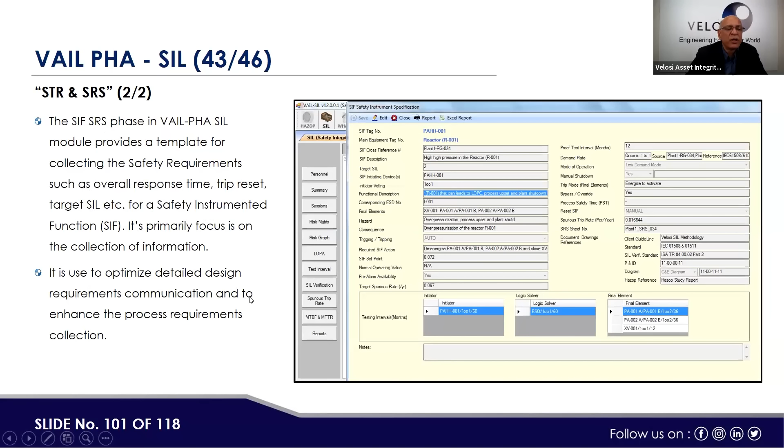That's why this software is helpful when dealing with thousands of SIFs. The SRS phase in the VAIL-PHA SIL module provides a template for collecting safety requirements such as overall response time, trip reset, target SIL, etc. for a safety instrumented function. Its primary focus is on the collection of information, used to optimize detailed design, requirement communication, and to enhance process requirement collection.

MTBF, MTTR - these are basically failure rates. If a failure is occurring, what is the mean time between failures, or MTTR, mean time to repair. Mean time to repair refers to the amount of time required to repair a system and restore it to full functionality. The MTTR clock starts ticking when the repair starts and continues until operations are restored. This includes repair time, testing period, and return to normal operating condition. To calculate MTTR, you divide the total maintenance time by the total number of maintenance actions in a given period.

Now, other things like technology being used, testing interval, SIL verification, spurious trip, SRS, MTBF, MTTR - these are all SIL verification functions. Meaning, to ensure that our SIFs are working as they should be working. We are in control of the integrity management system for these SIFs. It should not be the case that SIFs are installed and are not being tested.

When there is emergency around the plant, the system is non-operational. This is very, very important, right?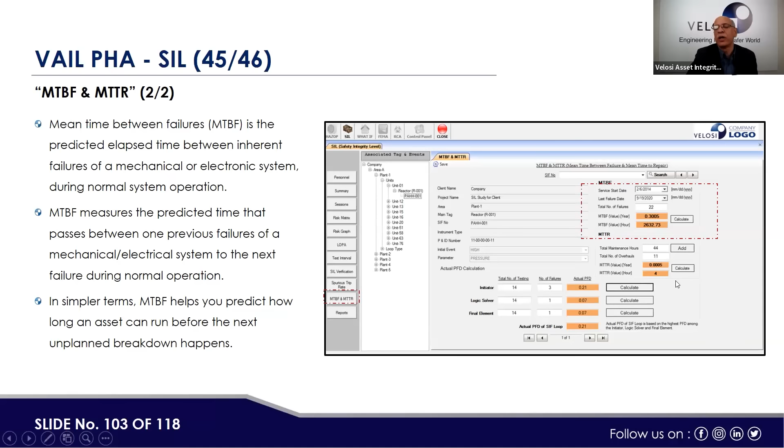MTBF, mean time between failures, is the predicted elapsed time between inherent failure of a mechanical or electronic system during normal system operation. MTBF measures the predicted time that passes between one previous failure and the next failure during normal operation. In simple terms, MTBF helps you predict how long an asset can run before the next unplanned breakdown can occur. So our system can calculate the total number of testing, number of failures, and the actual PFD, and then correlate to the MTBF and MTTR calculations.

Various reports can be generated by the system: risk matrix report, risk graph report, LOPA report, comparison summary report, testing interval report, SIL verification report, SIL verification summary report, STR report, SRS reports.

Now, before I go to the case study, let me show the system again. Why is software required? If you see here, the number of SIFs is many. Plant, unit, and each unit there are SIFs or SIF types, so many, and each SIF type has so many high level SIFs, and each level these are in thousands, then area is also changing. If we try to see all this data, it becomes troublesome, like drawings, attachment, bulk data upload is possible, comparison summary.

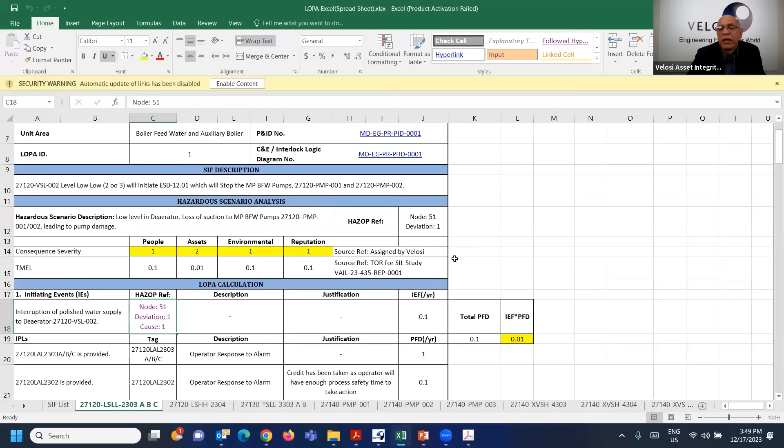For LOPA, we still use Excel, but if you see here, just a minute, I cannot show you, it's hiding below. The SIF list has so many SIFs, you can see one item only, and then for each loop we need one sheet, so it becomes sometimes difficult to manage via Excel. That's why some parts can be done in Excel quickly, but then we import the information into the software for demonstration and control purpose. I cannot show the sheets below, everything is hidden.

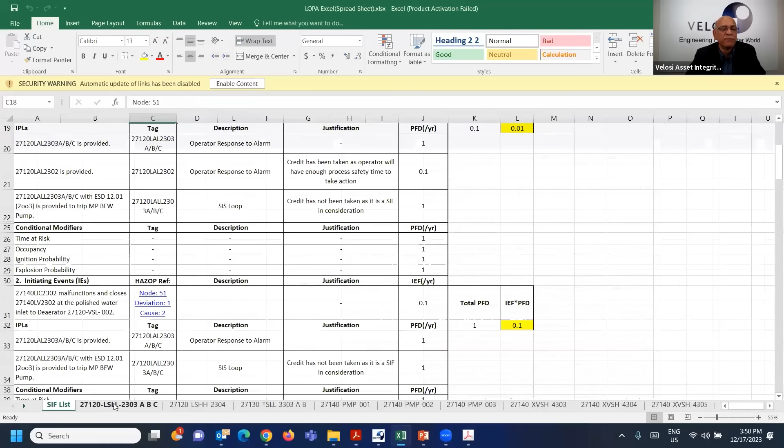If you can move down, bottom side, right, where the screen is coming. Yeah, okay, if you see this, these are the various loops, so one by one I can show you. Other loop, another SIF, it is each SIF if you see it. So this way you can use Excel also, if you can see, many are there, right? So just to show you, it is not that we are only demonstrating to take software, we are saying it can be done in Excel also, but the data is too much to be managed.

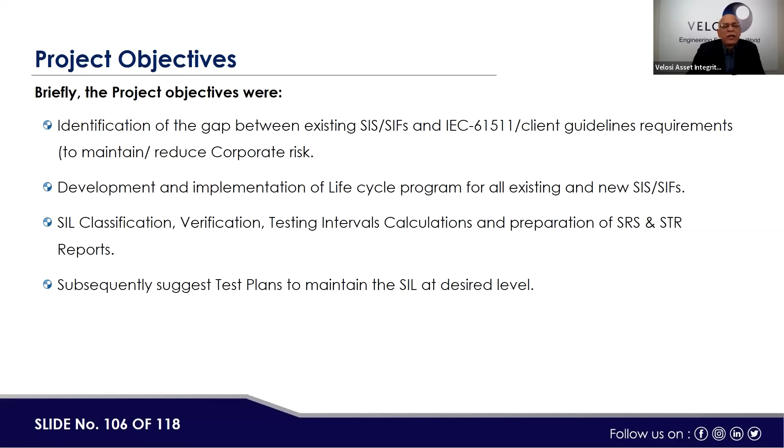Last part, the case study is not a big one. What we are showing here, we're showing you only the result. Briefly, the project objective was identification of the gap between existing SIF and IEC 61511 client guideline requirements to maintain reduced corporate risk, development and implementation of lifecycle program for existing and new SIFs, SIL classification, verification, testing interval calculation, and preparation of SRS and STR reports, subsequent suggested test plans to maintain the SIL at desired level.

So the scope of this project was to carry out the following activities: preparation of master plan, SIL assessment, SIL verification, calculation of testing interval, preparation of testing plan, preparation of safety requirement specification, preparation of safety lifecycle management system.

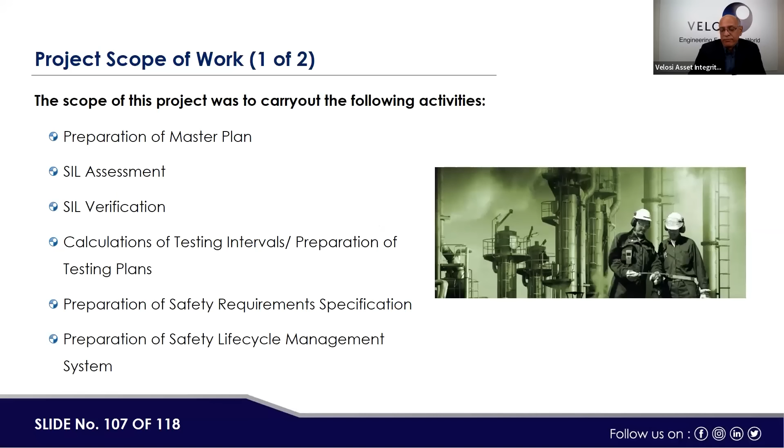So major deliverables, what I said earlier, the same: master plan for the safety lifecycle management, list of all SIFs with assigned SIL, SIL assessment report, testing interval report, SIL verification report with calculation sheet for each SIF, SRS and spurious trip report, gap analysis report and recommendation for each SIF, software, VAIL PHA-SIL.

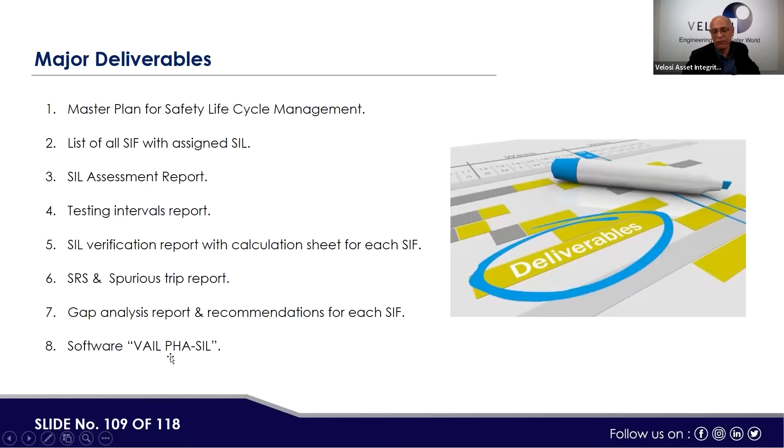The following stages were carried out to execute the project: preparation of master plan, carrying out SIL review, SIL verification and analysis, developing testing intervals, and generating reports and recommendations.

SIL assessment has been done to estimate the minimum risk reduction required against intolerable risk to bring it to a tolerable region. This reduction has been evaluated in terms of SIL level.

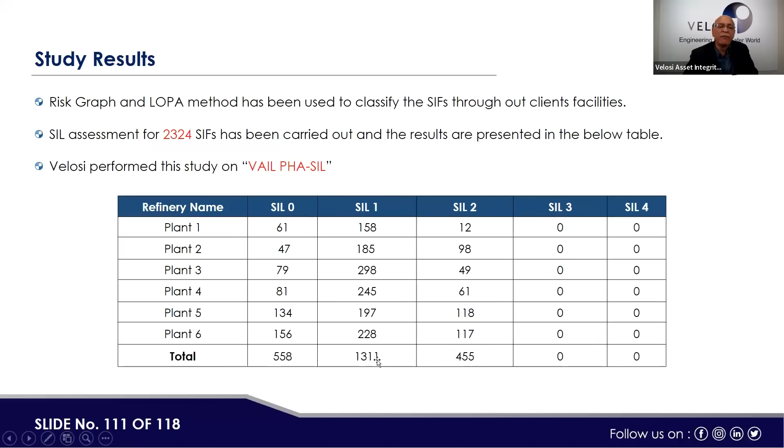The results coming from each plant: SIL 0, SIL 1, SIL 2, SIL 3, SIL 4. SIL 3 and 4 were zero. SIL 2 had a total of 455 SIFs, SIL 1 had 1,311, and SIL 0 had 558.

As a general recommendation, all operating units of the client facility have been undertaken during the SIL study. Most of the SIFs met the requirement of the standard. Recommendations have been provided against all SIFs which are not meeting the requirement.

Recommendations have been made, for example, to keep the flame scanner in operation during normal operation, in addition to their use only during startup.

The spurious trip rate has also been checked, and where it was higher than the target value, recommendations have been provided. A redundancy check of all components of the SIF has been performed, and wherever there is a gap, it has been highlighted to the client team.

There are certain storage tanks on which only Low Low SIFs are present. On the contrary, similar type of tanks have High High SIFs as well. Both Low Low and High High SIFs should be available.

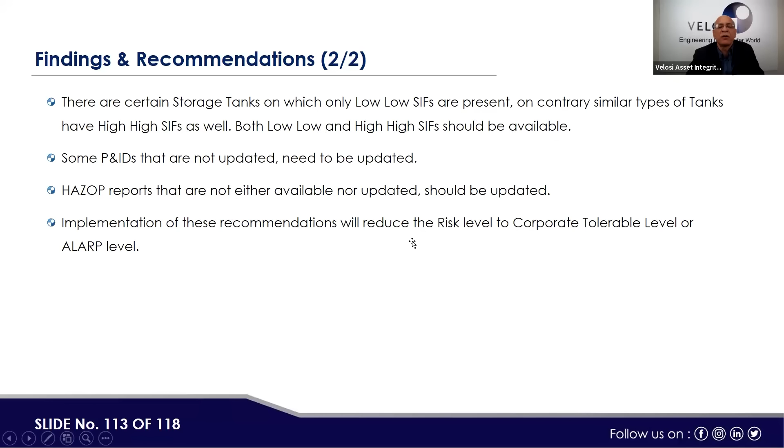Some P&IDs are not updated and need to be updated. HAZOP reports that are either not available or not updated should be updated. Implementation of these recommendations will reduce the risk level to a corporate tolerable level or ALARP level.

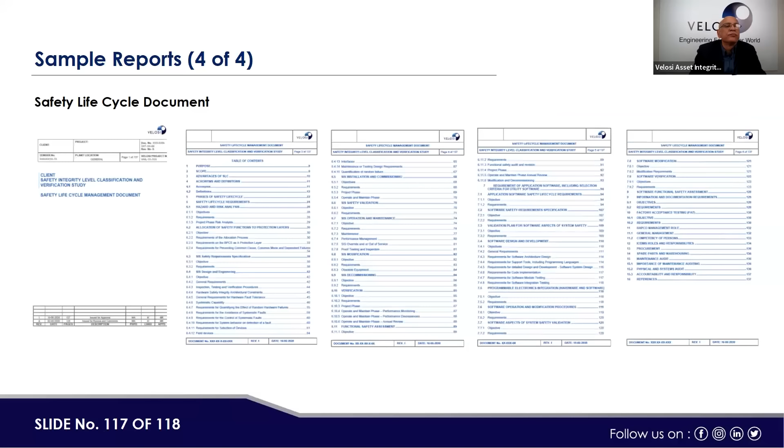So this is the SIL classification report in general, and this is the SIL verification report, the SRS and STR report, and the safety lifecycle management document, along with the content standard. This basically brings us to the last part of the presentation, and please be ready for questions, gentlemen.

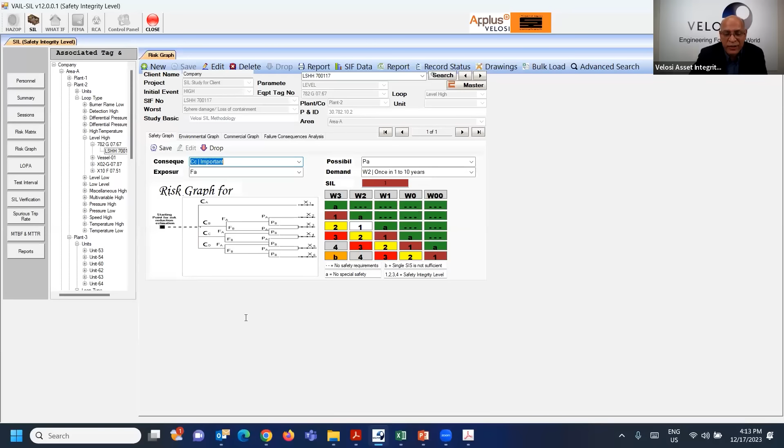In SIL verification, PFD is the only way, because formula-wise, as per IEC standard, let me go back to my presentation for SIL verification, I can go to test interval. Here, if you see, initiator, architecture voting, failure rate, then we have to determine this failure rate, then test interval, then test. So the aspect is we have to match it with the PFD. If I go to the next SIL verification part, this is the easy part: we compare all this data with the PFD, because PFD is coming from the LOPA SIL target.

Because when it is mentioned in IEC 61511 and 61508, there is another aspect that should be taken into consideration: architectural constraint and systematic capability when it comes to SIL verification, not only the PFD calculation. PFD is the ultimate target.

If you see here, architecture voting is here, right? Manufacturer, initiator type, then failure rate. So all that, and then testing interval here. If you multiply that all, then selected test interval, what we try to follow in terms of hours, then RRF required, SIL level actual, right?